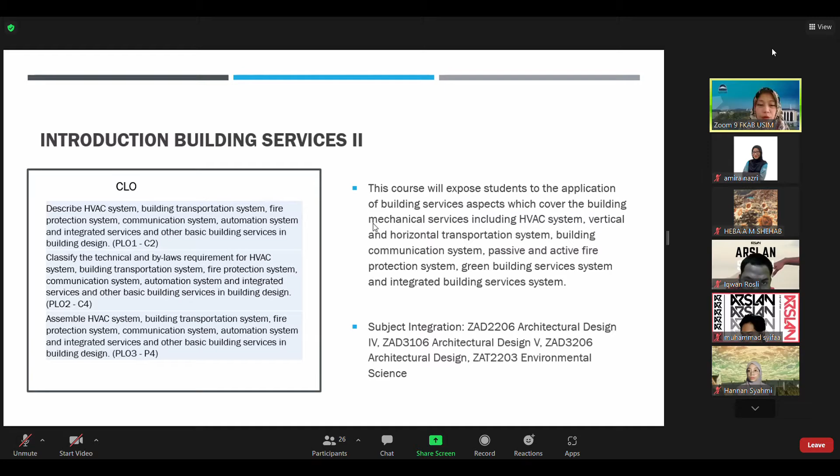Structurally build the buildings without a system. So this is the final, the complete buildings. So we need to understand all those services here, to embed together with the aesthetic, with all those colors, and how the vegetation is surrounding.

What is building services? This includes lighting, electrical, water supply, waste management system, aircon system, security, fire prevention, control and safety, mechanical transport, and also communication. So you may find that these are the main concerns as the architect, not only to draw, but you need to understand how it works in our buildings.

That is why management is not only for teamwork, but we are also in the technical, like building management system, to comprehend what is actually to embed in a building, to provide a responsive building that has communication, that can communicate with people effectively and support the environment.

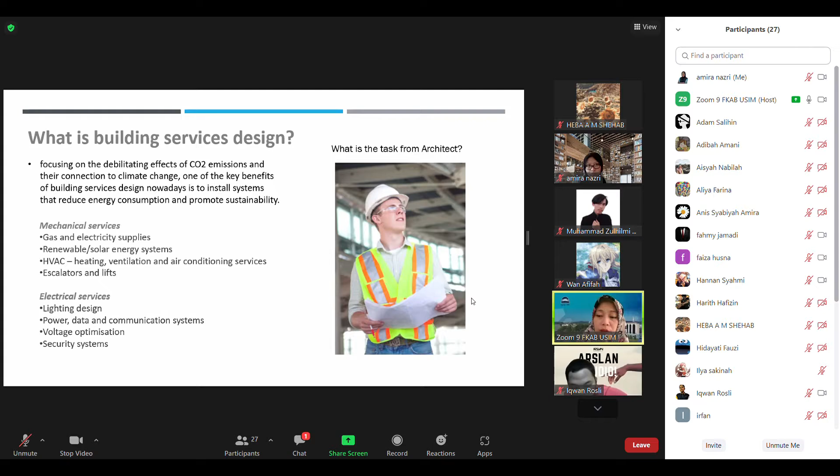So we come into a very serious part, a very serious stage. When you become an architect, you need to understand those stages - where to come, how to come, when the architects contribute to the building.

This is a person - if the architect has no knowledge at all. That's why this class is very important, tau, because in third year they don't have services anymore. So you have to master this class. So let's say I'm giving the task to Ilya.

Kita pergi tempat sekarang, you go to site, see what you can do. So you do not know if you don't have any knowledge, okay? What you're supposed to supervise at the site. You read the plan - yes, you can read the plan now.

You design - yes, you can design now. But how does this thing function, and have teamwork between mechanical - the interrelationship between mechanical, electrical engineer and architect. Apa task architect sebenarnya?

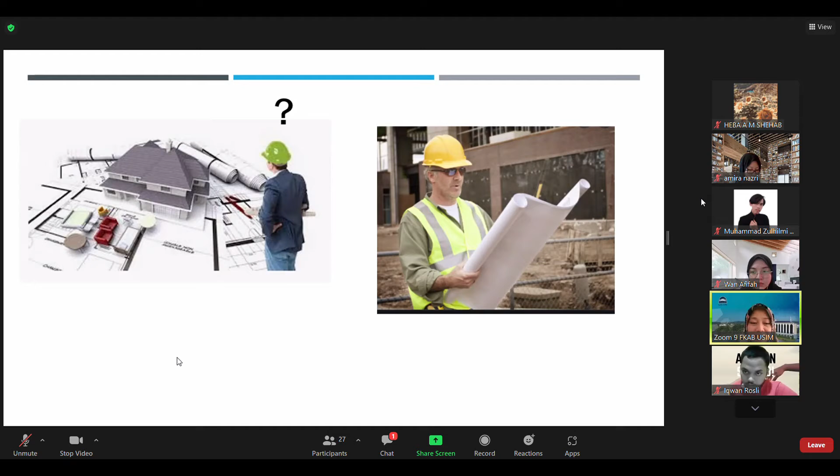Okay, you may read this one.

Building services design and energy efficiency, lots of ways, and also it's because architects have the decision where to allocate all those things. Lift, how does it look like? Bubble lift with glass screen. This will affect the cost.

Okay, escalator. Now what? Escalator is very costly. How much?

Okay, there are also the systems, lighting system. Nowadays we also use LED. Coming in PV solution, nowadays you beware with the PV.

What is PV? Photovoltaic. Everybody talks about PV, everybody can say, oh, I can draw PV, I propose PV. But what is PV all about? And how can PV generate electricity?

You need to understand. So in this class, we will have the green technology later on, around week 10 to week 14, because this kind of knowledge will be embedded in your design.

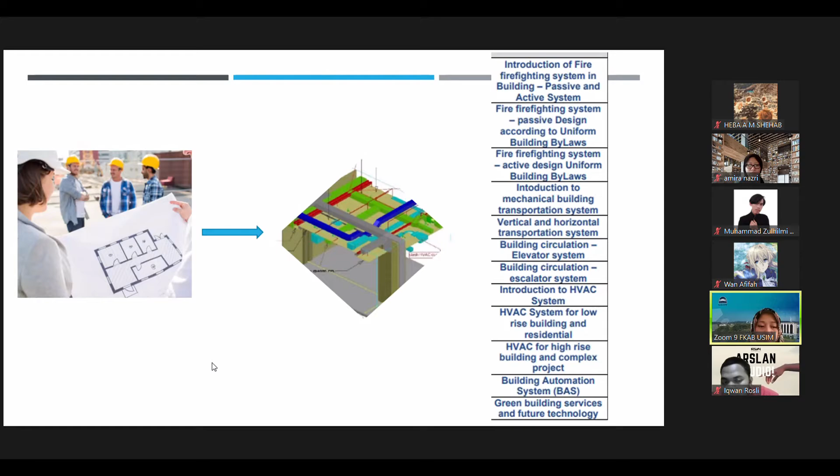Okay, for this class, I just give you the overview, the introduction for today, so that you will appreciate studying services. You will appreciate this class, you will appreciate this course.

Okay, so this is partly your seniors' work. Look at this one, it's very associated with your task. Okay, your left side is actually your site plan. Like the first day, you are going to have a site analysis. So what you should do? You need to analyze the surroundings.

You need to analyze here. What is surrounding here? Let's say this is your building. So radius for 2 kilometers.

Services, site analysis, watch out. Please take a look at your connection. What is it? Water connection, electrical connection.

If water connection, you must have in your mind, what is it? Inlet and outlet. What is inlet outlet? Coming water and distribute. When distribute water, that means it's sewerage, pembuangan sewerage. You have to understand. If not, how do you want to keep your sewerage? So you must bring all those sewerage to distribute to other parts, to the collection main.

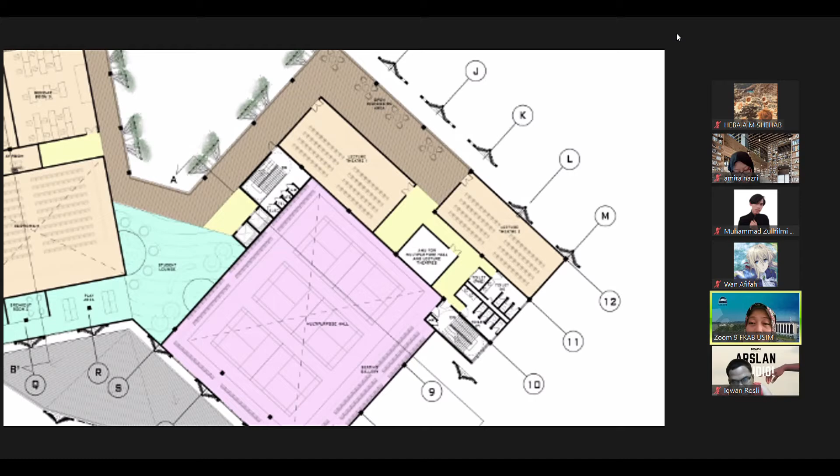Cannot, because the wiring has to be vertically connected from one floor to another floor. Okay, this part you can understand a little bit, and also how to check this is going to be parallel. So when you are designing a section, see, it has to be vertical. Lift, you cannot have the lift here and the second floor on your right side, your floor on your left side. It has to be vertical. How can this lift turn left and right?

And at the same time, you have to understand how the system for wiring above your ceiling area is. That is why in bylaws, you need to understand what is the viable height, the height needed for, let's say, public gallery. Gallery to public area, so you cannot design for 2 meters. In the bylaw, this is the minimum. The minimum would be 2.4, 2.7 meters.

Because 2.7 is clear, clear means not floor to floor. It's from the ceiling to your floor finish level. Floor finish level is above the tile. Okay, that's clear.

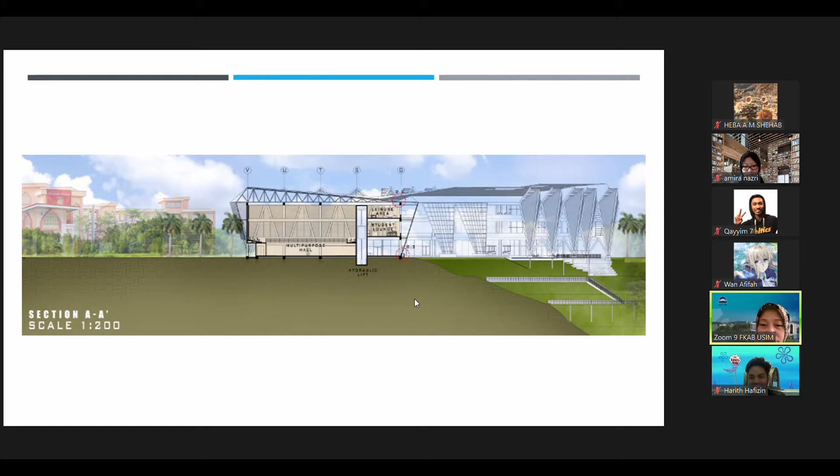Haris, don't sleep. Zul, ada Zul? Ada, madam. Alright, dengar suara. Semangat, insyaAllah. Okay, tak apa. This semester kena semangat lebih because this is quite tough.

But we try to help you all. Okay, that is why when you do the section, it's not on the structure side. See at this area, this is your senior's work. You have to think about the ceiling because all those piping, all those lines will be between. This is your concrete, this is your beam, and this is your ceiling.

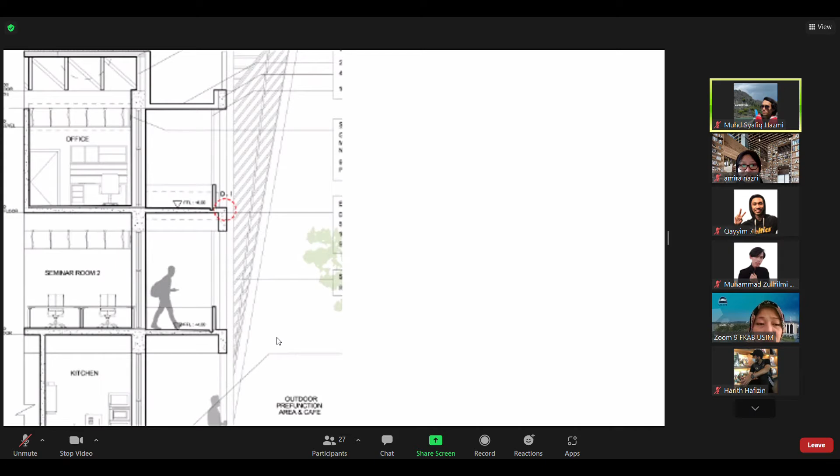So wiring, where you want to punch in? Dekat kawasan sini ni, you see my scroll? Nampak kan? Girls, bukan buat kek je girls, bangunan pun kena faham ni, mana wire nak punch in, right.

So this is architect's creativity. Sometimes when you ask other people that are not fond of design, they just say you can fix it out of the wall. But as an architect, we have to make the aesthetic value of the building somehow, or rather we cover it.

Sometimes we propose, okay let's say there is a rainwater downpipe coming in. Nampak tak cantik kan, rainwater downpipe, sometimes people propose the contractor just install it somewhere here. But the architect has the option to cover it, maybe with mineral fiber board to cover the rainwater downpipe. Nampaklah cantik and they colour bersama.

Okay, tak apa, I will show you the images. If it is not being supervised well by the architect, what happened to the building?

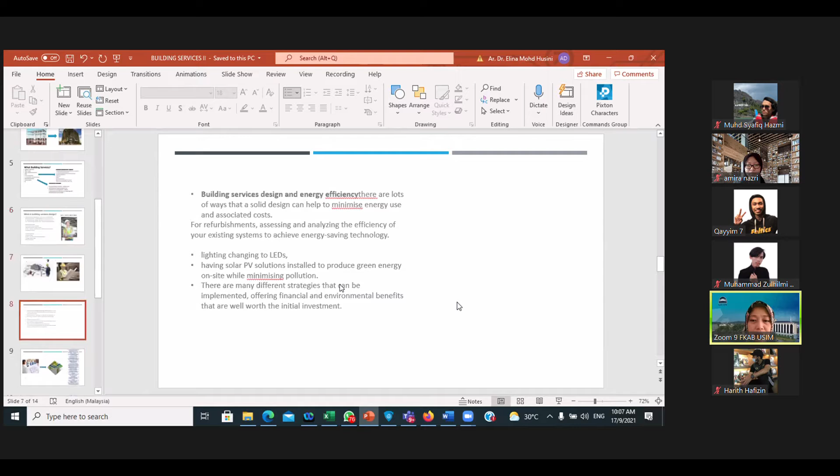You still can see this one? You still can see tak? Building automation system, building automation system. Oh itu sound system lah tu. Kat situ include all, sebab tu kalau misalnya you are designing a performance area, ataupun you may have the gallery, it's a hall.

So you need to design a space where people can control kat situ the sound system. Nampak tak, biasa dekat cinema, panggung wayang. Satu lagi, you can see those control room at a multi-purpose hall at the upper level, upper floor. Betul tak? Dan ini, pergi panggung wayang tak? You go to cinema? So you may explore where those people sit in this area.

So architect need to design tau, architect need to allocate where is the space for them. Nampak tak kerja architect susah tau. Tapi with this knowledge, insyaAllah, this is our responsibility. Okay, any other question? I open to question.

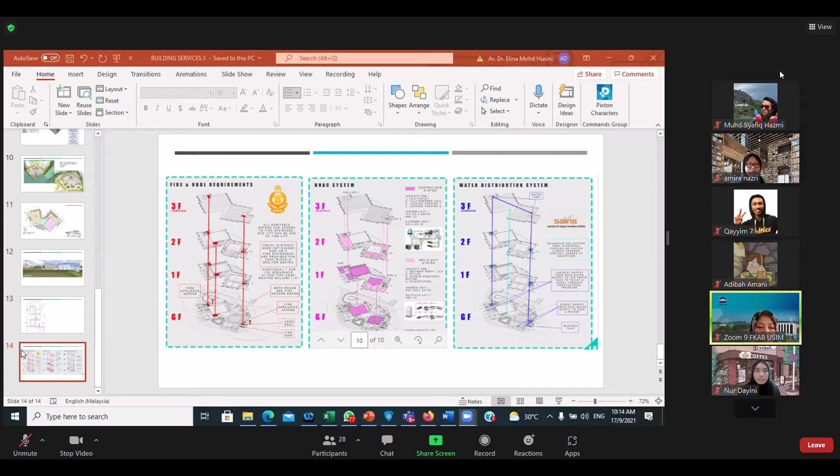Design - how to connect our thinking process to application, because you may think it's very difficult to adapt everything. No, it's very simple. That's why the second topic is the regulation part, so everybody knows the limitations. To design a lift, you want to get the knowledge of what is the exact size. When you are doing site analysis, those groups who did your site analysis must have the right size.

Okay, can everybody try to download the building bylaw, the latest building bylaw, 2010 building bylaw. Does anyone have it? Wait a moment. Okay.

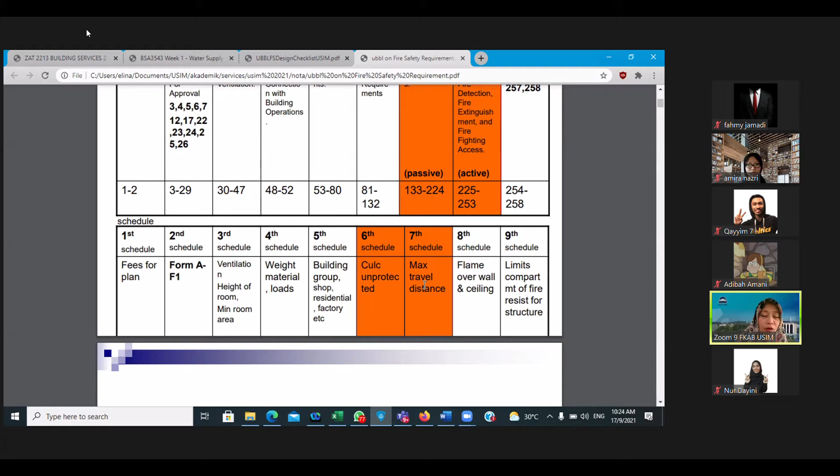This is where you need to design the distance from one point to another, your fire staircase. Of course your gallery will have a few fire staircases, not just one set of fire staircase, okay, a lot. This is based on your maximum travel distance.

And also you need to know passive and active fire protection. What is passive and active? Here, they call it 'kehendak menentang kebakaran' (fire resistance requirements). I will find you the English part. Some of the bylaws are written in English and also in Bahasa, so you may find the English part. You need to understand what is the purpose group.

It means, is your building for public use? Is your building for student, school category, or housing category? So the gallery is in the public category, commercial.

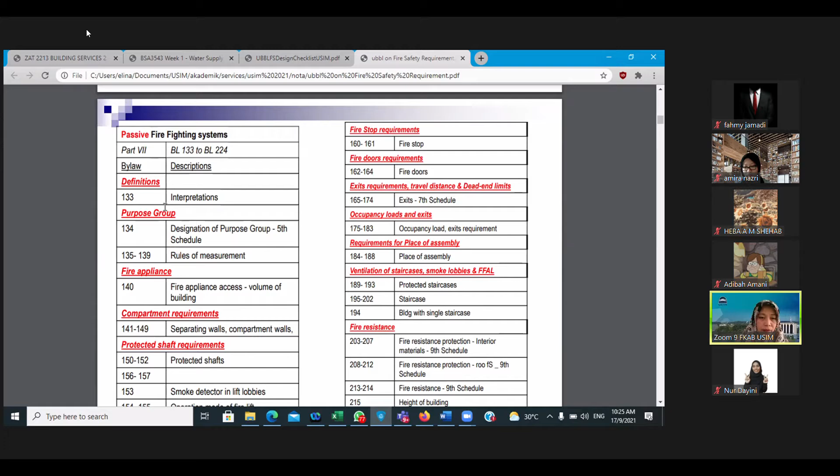And these are all the sections. When you talk to people, when you talk to Abang Bomba, you say my staircase is according to bylaw, according to section 140. You kena faham, you kena understand this one. You cannot just simply say according to fire regulation in bylaw, this is just general - you have to go in-depth on which section the bylaw says about fire appliances.

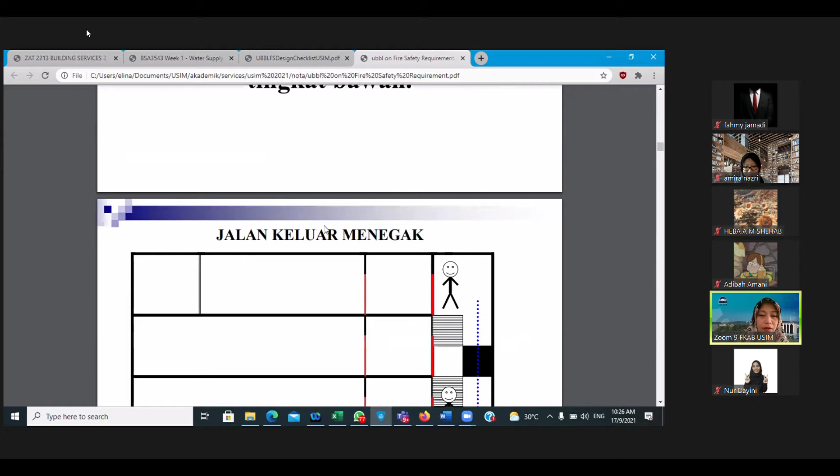Okay, alright. Because bylaws is a lot of bylaws, we just attach to what is needed.

Okay, so let's say that this is actually the route, the escape route. So this is just a very basic thing, meaning that this is all those offices, this is a fire staircase, and this is a lift. So where is actually you need to design a lift, and where is the best place, the best area to design and locate the lift area.

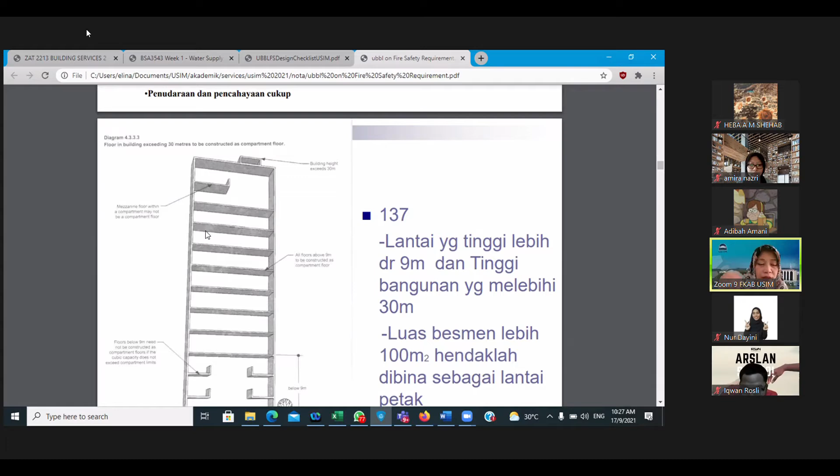This is also need to understand what is the height of the building. That is why when you try to design, when it comes to week 4 or week 5, to your individual stage, you need to understand, you need to identify what is the height of your building based on your sketch. That is why you need to sketch from the earlier stage. Cannot simply use computer straightly, move your cursor and do the floor. You have to sketch first to identify where is the exact level.

And see whether your accessibility is actually about a quarter of the land side. It's okay, today is just introduction. I am doing the calculation based on your drawing on week 4 later on. Okay, this is just introduction - what is inside your building bylaw?

So it's also related to mathematics a bit. The calculation, how you want to find the volume. The volume, how do you calculate the volume? How do you calculate the volume of the space? Panjang kali lebar kali tinggi - width times... the height times width, times... yeah, so you get your measurement on your volume.

So based on the volume, let's say this is the building, so you have to refer to the schedule. This schedule you can't calculate, it's already there in the bylaw. Minimum perimeter, meaning that 3/4 of the site here to allocate your accessibility for bomba, for fire engine to move around within your building. Okay, this is the schedule.

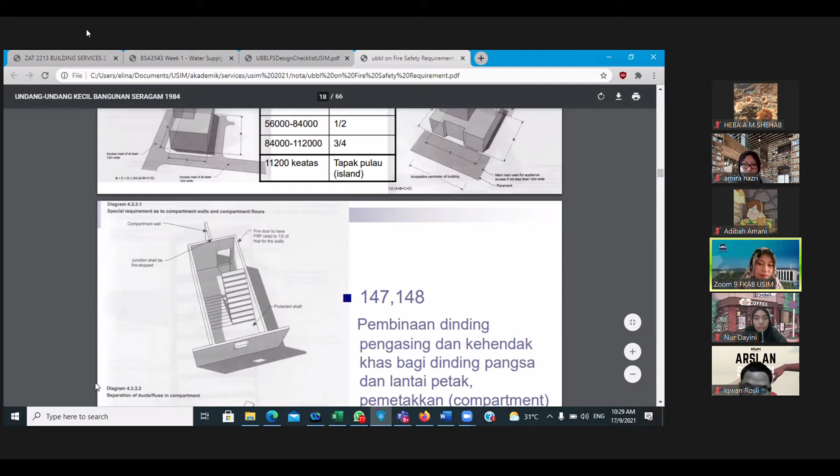So same goes to this one - this is a fire staircase. Where you want to allocate the fire staircase? What is the size actually for public? And you do have the opening at your fire staircase, the material, the size, the thickness of the wall - these are all stipulated in your building bylaw.

And of course here, is there any place to put your ducting pipes? Alright.

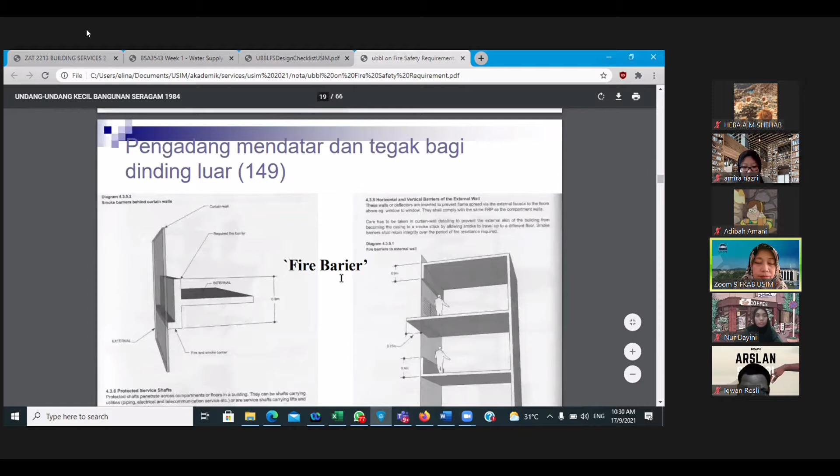Okay, why do you have to know this one? Because when you are designing the partition or the wall, you have to think along with the piping that will go from down here up vertically to your upmost story. Let's say you are having a riser - what is inside the riser? Telecom wiring. Okay, what else? The electrical, the piping for cold water, hot water if necessary. Okay, that is why you need to locate where exactly.

So somehow or other, we can refer back to the drawing I was showing you just now. Okay, where was it earlier?

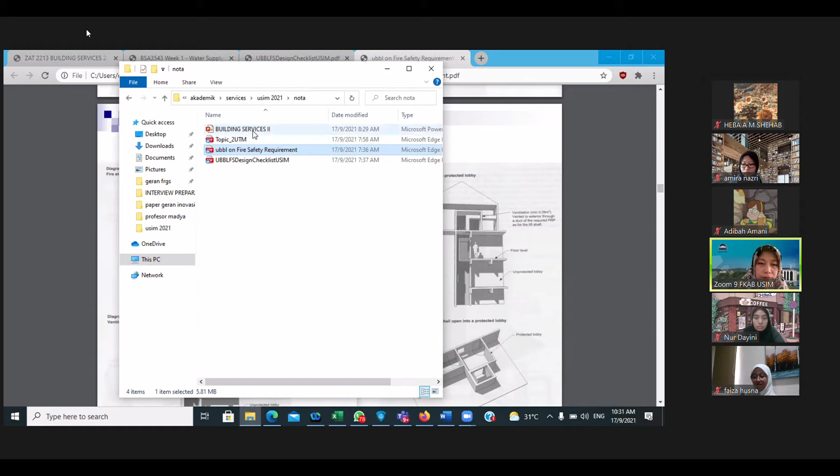Okay, see this - the area you design, we call it partly a services area that will allocate all those piping and wiring vertically. This is in the drawing, you may try to design as it is, but with reference to how much the height, the size of the area. That is why you need this to refer to how much space is actually required.

Okay, just now I mentioned only lift, only escalator. But that one, they can move, they can't function without the wiring part, and also the automatic part, meaning the automation part. In the bylaw, you may see that there is a passive and active design. Passive is without automation. What is the area that is without automation? It's the staircase. So you need to understand where the staircase is to be located in your drawings, in your design.

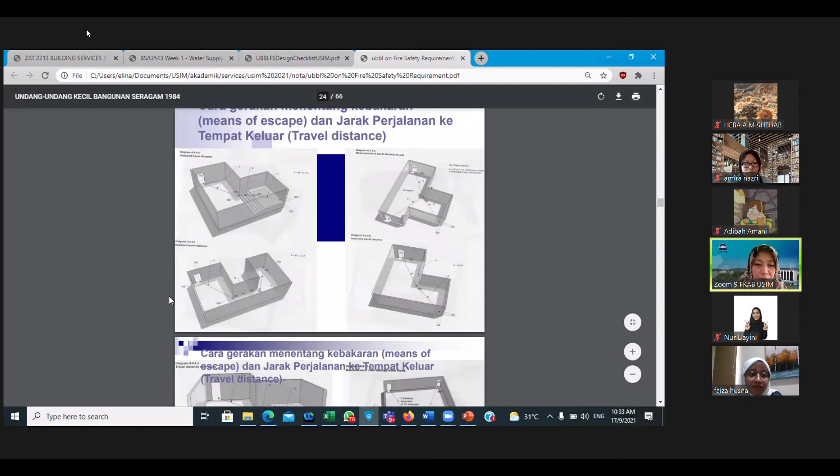Okay, faham? Faiza, ada soalan tak? Up to here, I think takut you all dah jumble with those things. Any question? Faiza, any question tak? No, madam. Okay so far boleh, madam. Yeah.

Madam, I want to ask, for the space for the fire resistant, do we need to divide the space, or can we combine the space with other space? For example, we put the fire resistant space together with maybe the lobby space. Can we combine it together or not?

Okay, that's why when we are designing a space, there's an area we call nettable area, and gross floor area. Gross floor area means all of this, look at this drawing - these are all gross floor area, the total floor area.

When we call it services area, it only consists of toilet - there's a connection with the water supply, the toilet area, control system room. This is also the passive fire staircase area, categorized under services. There is also electrical area here - wiring, the board, switchboard, everything.

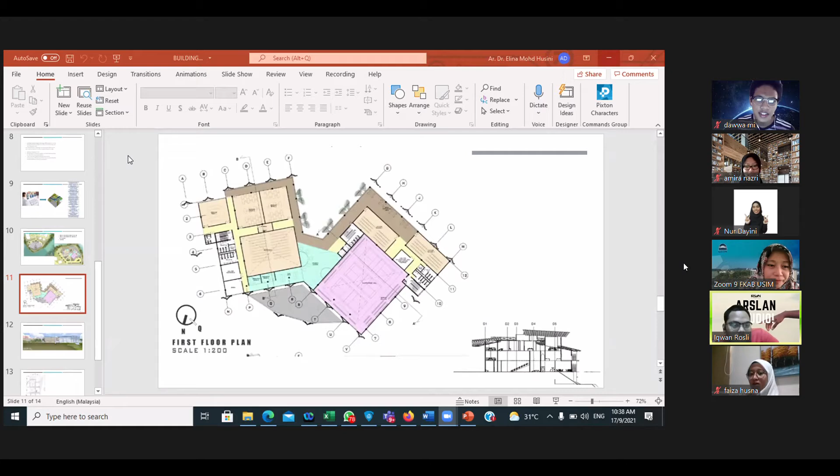So basically, madam, for the services space, we need to divide it lah kan? They have a special - it's not divide. You need to design. We can't say divide, because if you divide, how you want to divide? This is not mathematics, this is design.

Design means that, okay, look at this. It's not so well an image. Okay see how this one - this ties back to your design. I can foresee that this area is a lobby.

Lobby needs to provide a very huge, wide, welcoming area. That's the sitting area. You have to think about where the receptionist, the display area, to show pusat apa, gallery, rumah panjang. Where you want to allocate all those name of the building, so the display area - where? At the lobby area - where? So you have to design.

Okay, ni baru gallery. So what are the requirements needed in the gallery? Can somebody see back what is embedded in your design? Dah buka design class - that always, they already have design class kan?

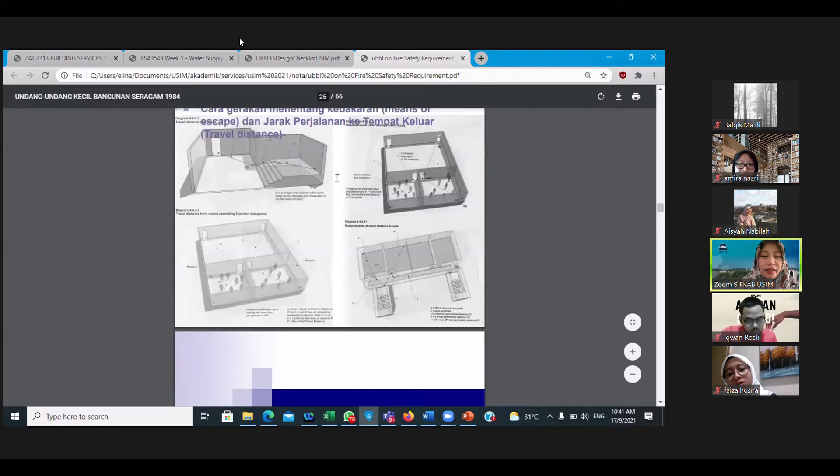Why is this very important when we talk about travel distance? Let's say you're building your area and you have to provide another partition or wall. There is a regulation, and you have to find where the main door to escape is. So if you are proposing another wall somewhere here, from this door to the end of the area, it needs to be only 6 meters.

What happens if it's more than 6 meters? Why? Because people cannot escape within 1 or 2 hours according to your specification. This is actually the fire door. It has to be a fire door because it will detect if there is a fire. The door is about 1 or 2 hours fire resistant, that's why we call it a fire door.

Okay, so normally for a building less than 12 meters, you can provide only 1 door, with the reason that your building is only for residential, not for public. But your gallery now is meant for public. Even though your building is less than 12 meters, you need to provide another secondary access. That's why you need 2 staircases.

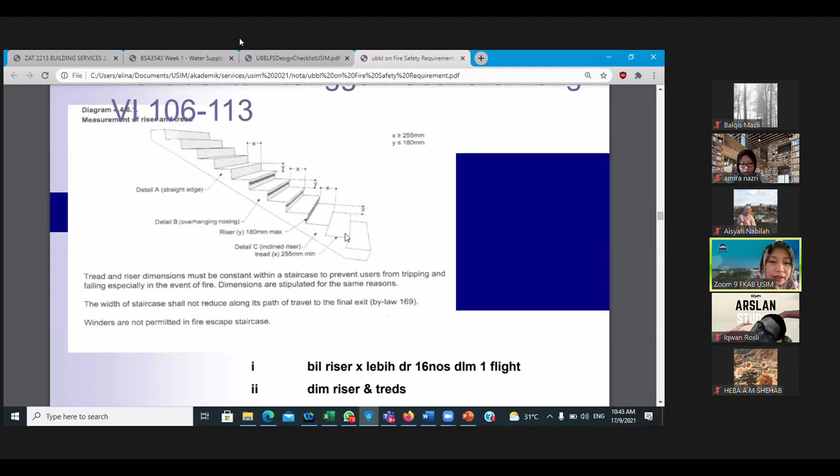This is a very fundamental design. You need to know what is the maximum for the tread and riser of the staircase. This is very much related to your design. Later on, you will design how many steps are needed. So based on the bylaws, this is your tread, the horizontal part, and vertical here we call it the riser. So take this one, okay.

Minimum is 255 mm, minimum. What happens if minimum - you can provide 270 here, but you cannot provide 250 or 245. Why? Iqwan, do you have a reason? Can you share? Is there any reason? Why can't you design less than 255? She says this is minimum, meaning only 255 and above. You cannot go lower than this number.

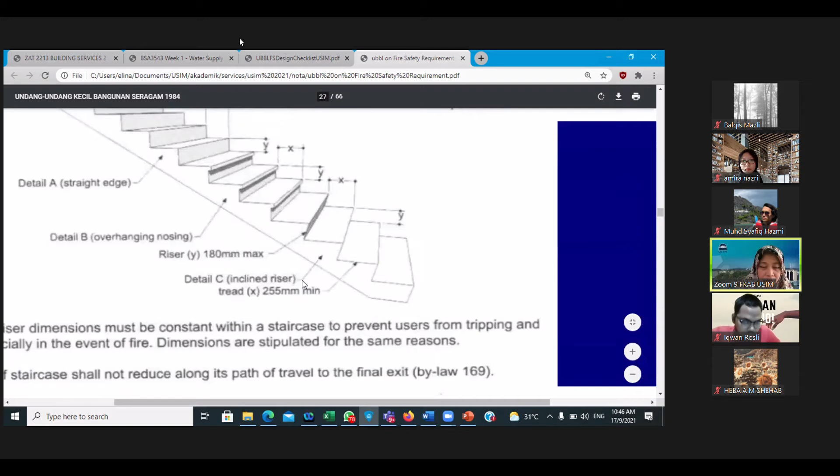Okay, all right. So remember, this is what you want to refer to: the width of the step, the riser. Okay, see the riser. The riser here, why?

180 mm maximum, you cannot go higher. 185, can or not? Who's this? I want to ask. Dawwa, you're silent, Dawwa. Yes madam, can I say that you need to design 185 here? Cannot, because the maximum required is only 180. Yes, so normally people can go for 150.

150 is general, a very normal measurement. And this one, the tread is 275 or 300 - see what is the function. If this is a fire escape, you can use this measurement. If for public needs, with lots of people arriving at the area, you can have a larger tread, meaning it can be up to 300 mm here.

The tread, okay, alright. Understand this, Dawwa? Understand, madam.

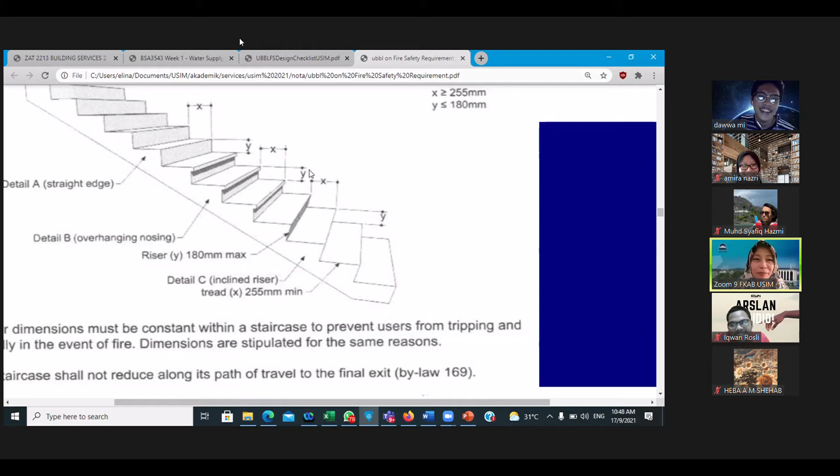Okay, so far that's it. We talked about bylaws. This one you have to read, you have to analyze. Okay, this is not your level yet. A protected lobby is needed, because a protected lobby has to be protected - you have to provide a fire door, and the wall thickness should be 230 mm. When to apply this? It's based on the height of the building. So how many stories should you provide for your gallery? Is there - bro already said.

More or less 2 stories, about 12 to 13 meters height. So you don't need a protected lobby. Third year second semester you need it, because the building is up to 8 stories. Somehow you may or may not need the protected lobby.

I'm just giving you the fundamentals. This is also something you have read.

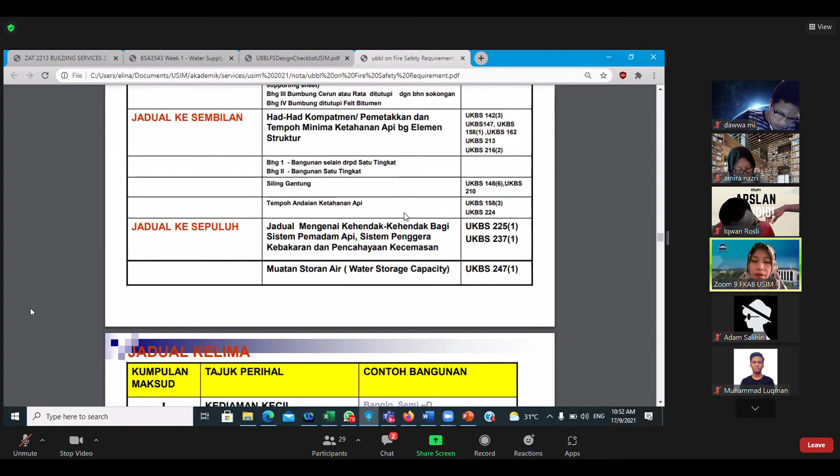So my task today for you is to download the PDF, the latest bylaws regulation, and distribute it to your friends. You have to find it. This slide is already summarized, because in the bylaws there are a lot of pages and you do not know where to read first or where to allocate your understanding. So this is already summarized, but you need to know the overview of this regulation.

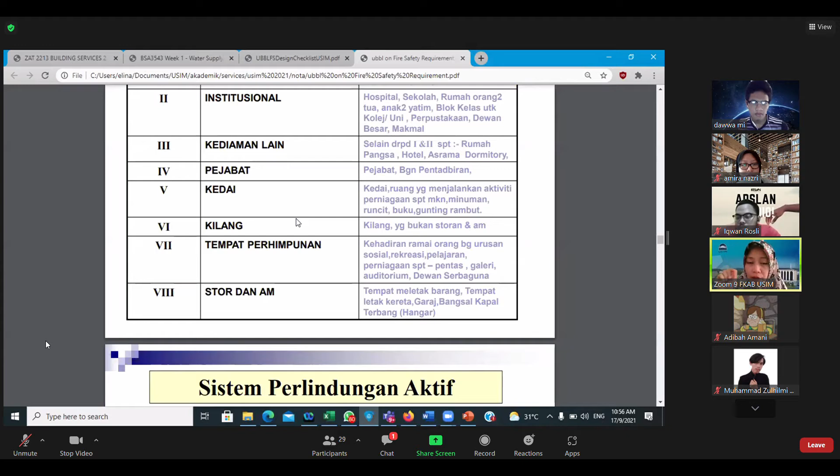You have to jot this down. You have to open Schedule 5, find Schedule 5 in your PDF bylaw. Inside your PDF you can find this, Category 7, Group 7, 1, 2, 3, 4, 5, 6, 7. Find it first, okay.

So inside there you may read the description. After you read this description, that gallery is under this category, you have to find Schedule 7 inside your bylaw. Find that first, later I will discuss it, but you have to find it first. If not, you cannot imagine it.

Download first, find Schedule 5, see Category 7, perhimpunan orang awam, for public. And find Schedule 7, find what page Schedule 7 is on, see Category 7. That's your homework first.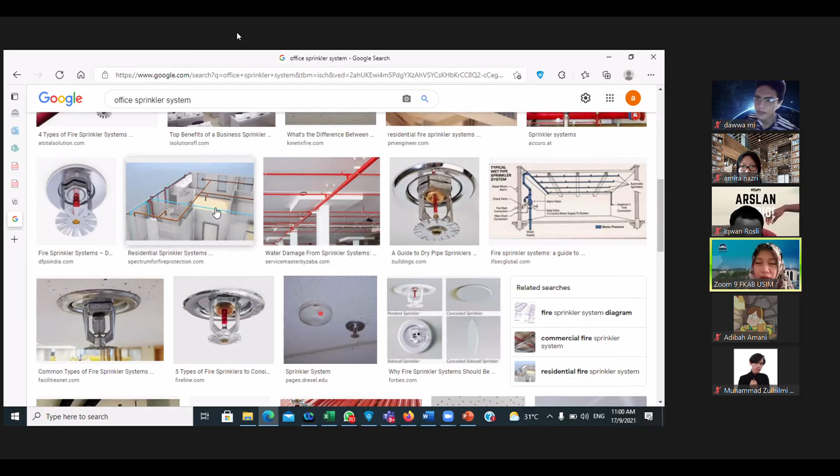would be water piping, cool water or hot water, running above the ceiling area. If you take out the ceiling, you may see that these pipes run above your head, above your ceiling area. This happens.

And also they have a fire sprinkler. Fire sprinkler is for high-rise buildings. I'm not so sure, but if you are only designed for 2 stories, there's no need for fire sprinkler. But if you are designing more than 8 stories, you need fire sprinkler because your building exceeds 18.3 meters height.

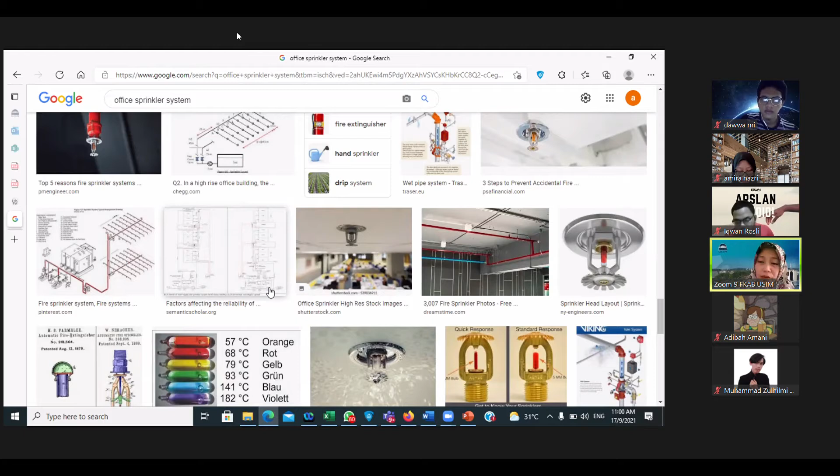Okay, now you are adapting. In your Services 1, did you also learn about this fire protection? Your Services 1... You're muted. What did you learn in your Services 1?

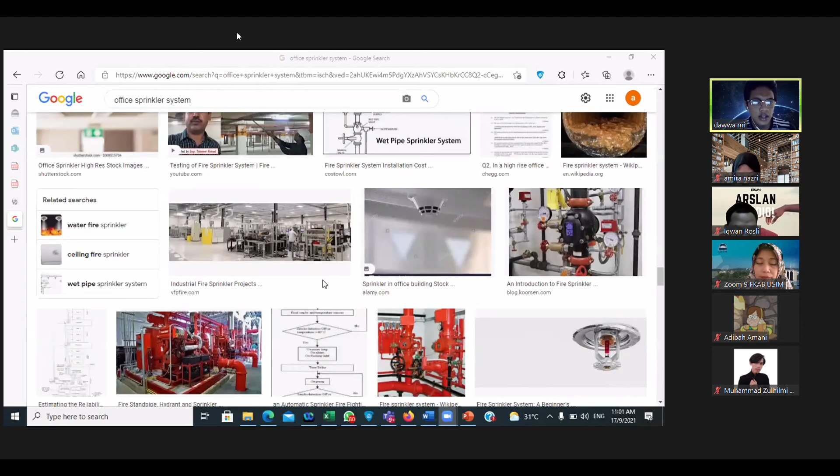In Services 1, I think we did not learn about fire sprinkler or fire safety, but we generally learned about the water system, plumbing system, electrical system, for housing. For housing, okay, it's more or less the same.

But now the gallery is larger, right? More complex. Previously your housing was only one story, about 6 meters from the top rooftop, but the ceiling height to finished floor level is only 3 meters. Now 2 stories means another story on top, so your building may be 8 meters, based on your design. That is why more systems need to be included in the building.

See? The higher the building, the more systems you need to include to make it function. So it's very complex, but it's satisfying if you know this kind of information—you can design whatever story.

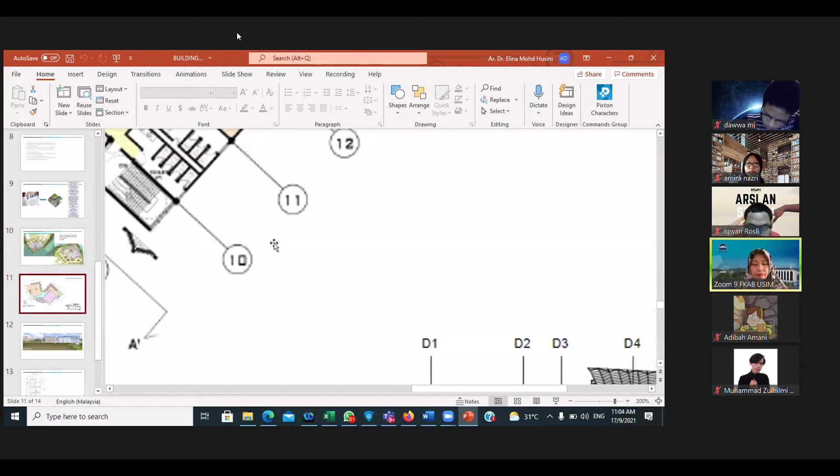Where do you want to design to put all these things? At the services area. I already told you, where is the services area? Okay wait, let me break it down. Services area meaning somewhere here at grid 10 to 11.

So you have to design all this piping to come in vertically at this area. It cannot be at the middle, cannot be at the lobby, cannot be sometimes at the learning area or the office in the middle. No, you specify them—it has to be at the zone area of the services.

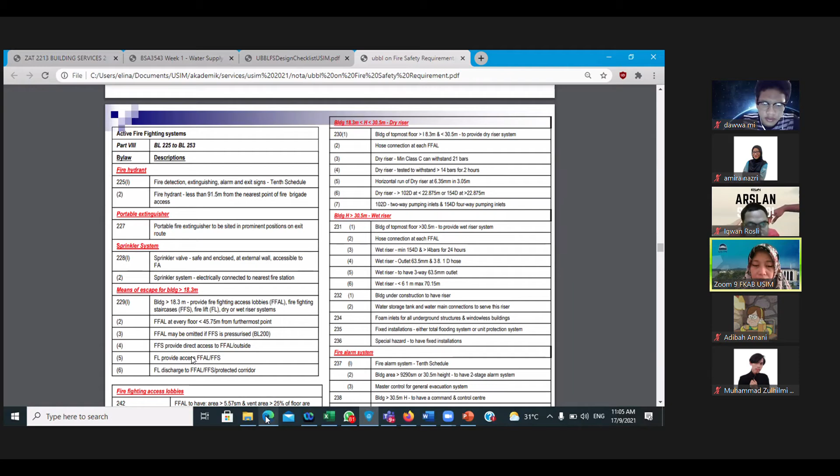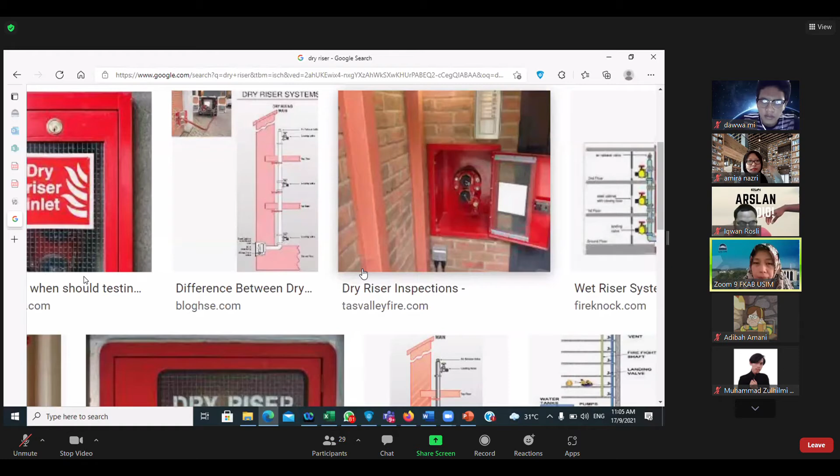Come back. Dry riser. Okay, this is when the fire engine comes, they just take the water through the piping from the dry riser inlet, that's its name. So they just provide a place for the pipe somewhere here. See, this image just has a pipe, there's a place to fix it—water from the fire engine disperses to other floors. That is what dry riser is. This is the dry riser outlet. So they need a pump—if there's a dry riser, they must have a pump.

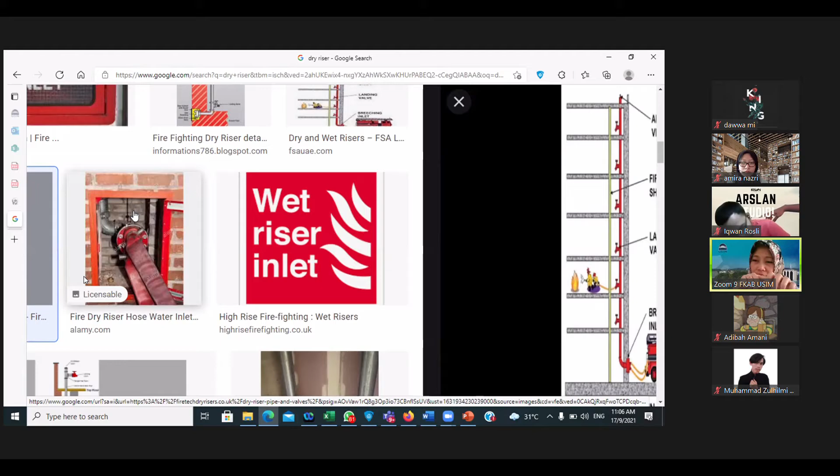Okay, what is wet riser? This question always comes up in exams. Wet riser—what is the difference between wet riser and dry riser? I repeat, look at this image. Dry riser: when the fire engine comes, they just tap the hose into the water inlet, so the area of the fire dry riser—they just tap it and the water comes out directly.

Normally for high-rise building, we need dry riser. Why? It's because water pressure won't be adequate. Tak cukup water pressure, so there must have a dry riser there.

To allow the valve access, itu adalah one of the reason. Okay, tengok sini apa dia. Wet riser pula, wet riser.

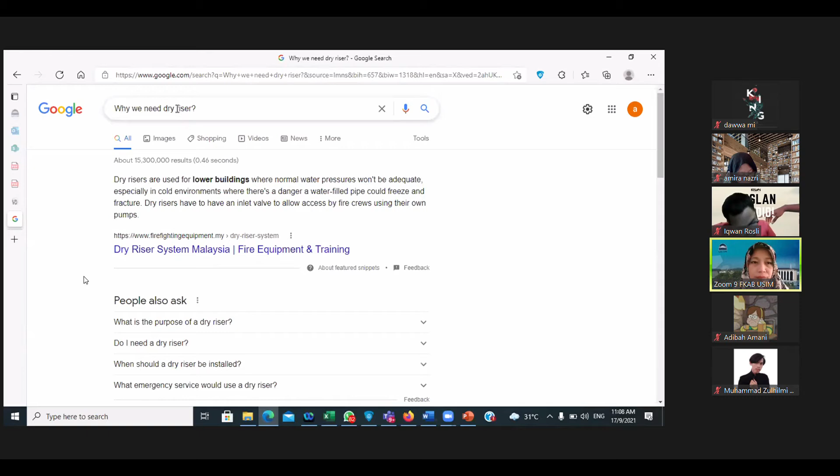Okay, ini sebenarnya nanti the next, tetapi kita today just to know the exact vocab in services, so that you familiarize.

Wet riser, so wet riser are permanently charged with water. And dry riser do not contain water inside. They need the fire engine with the hose, fix, connect, barulah keluar air. There's a water from the fire engine. The dry riser is only a place, the hole, the pipe there without water. But wet riser, they are permanently charged with water. They have to supply water. Inside wet riser has water.

Okay, we see the image here. Ni dalam. If you cut this pipe, there is water inside. But for dry riser, no, there's no water unless you connect the hose from the fire engine. There would be water running through the pipe. Wet riser is always charged with water. Whatever time you cut here, there will be water here.

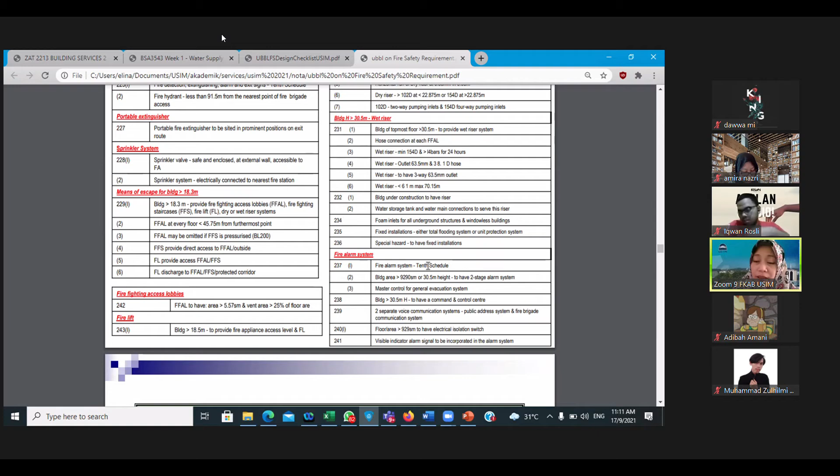I'm showing to you, if you're gonna do the submission to Bomba, when you work with industry, you are preparing Bomba submission for approval. So you need to identify the location, proposed location for fire alarm.

Okay, I stop dulu sementara. Any question? So today just to understand the vocab, the words, the wording. These wordings, the image would be like this.

Any question? Boleh, madam. Siapa for tu? Ilya, Ilya. Oh Ilya, for the wet riser, does it mean that if it's leak, the water will running endlessly? Okay, that's the question. What's for the wet riser?

Okay, wet riser. Kalau bocor, water tu will still running? Yes. Tetapi dia ada tempat untuk control dia punya. Okay, see back this images, mana images wet riser. Sebab tu dia tak boleh bocor. No.

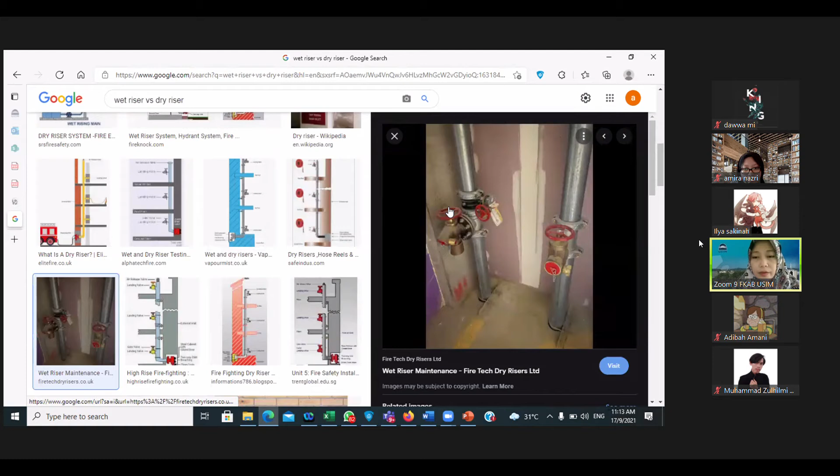Okay, so dekat sini dia ada, you can open up here. So if let's say on the upper floor they want to have maintenance, they will close down the pipe by using this tap. They screw the tap, betul. So they need this thing to control. Boleh Ilya? If they open this one all the way up, there's water charge inside here. But let's say there's maintenance happen at upper floor, they have to close the pipe.

Okay, say madam. The announcement like it's just like our building Tamhidi. Our building Tamhidi, they want to clean up the tank at the rooftop area, they will close so that the water is not coming out. So they control from there.

Madam, for the wet riser, it get the water from fire engine? No, from the tank, kita ada tank. Right, I tunjuk gambar. Wet riser dia ada tank dia. For the dry riser, dry riser lain. Dry riser get the water directly daripada fire engine. Dia ada bawa air dia dalam fire engine dan dia tap melalui hose. Turunkan hose dia. You know what is hose? Yang macam fire apa tu, hose reel tu. So dia sambungkan, connect the water.

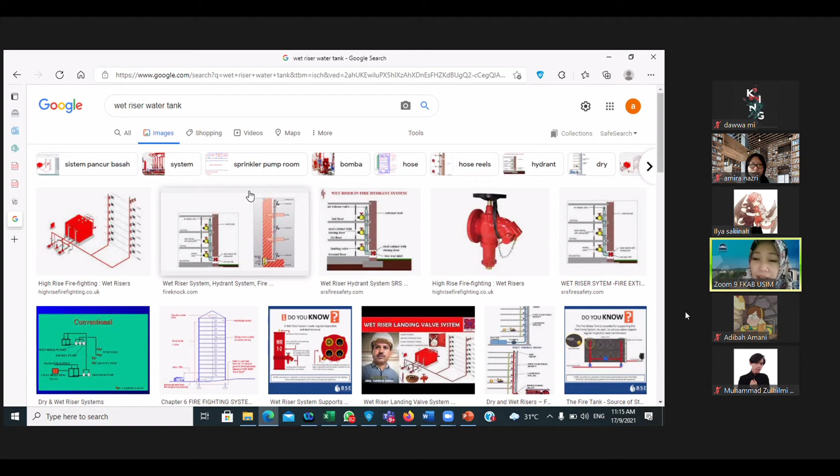Dalam fire engine tu dia ada water tank dia sendiri kat situ, to supply water dekat tempat yang tak ada pressure, menghadapi masalah pressure air. Tetapi kalau wet riser, dia ada tank dia. Okay, tengok dia punya ni, nampak ni, atas kat roof ni ada tank.

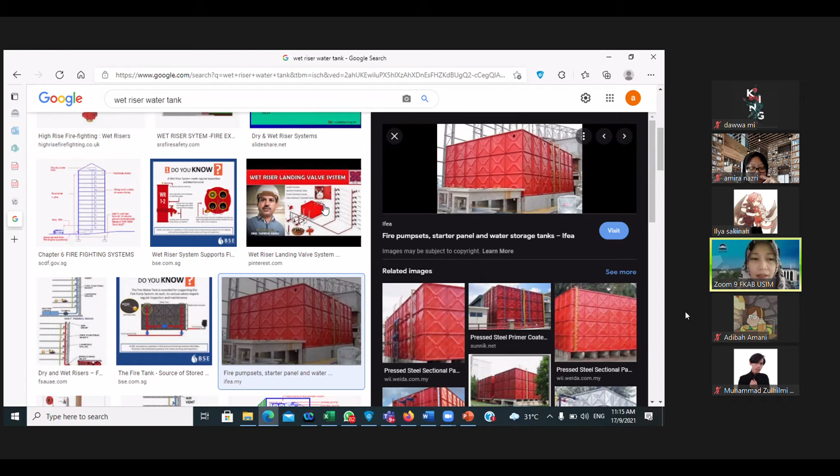This is for a big building. For you, it's only a quarter of it. This is the tank. It supplies your wet riser because there's always water inside the pipe. This is the diagrammatic view, with the storage tank here. Understand?

Okay, thank you. Anyway, you can also do your own research on this. Wait, where was the image? Because this is the first time you're vetting the bylaws, and at the same time you get familiar with the terms.

See, there's a tank. Where is the connection? That's why during site analysis you need to know where the main distribution pipe is from the land. Let's say the land is somewhere here, then underneath there's piping and there must be a pump. So the water gets pumped into the tank, goes up vertically, and is stored inside the storage tank.

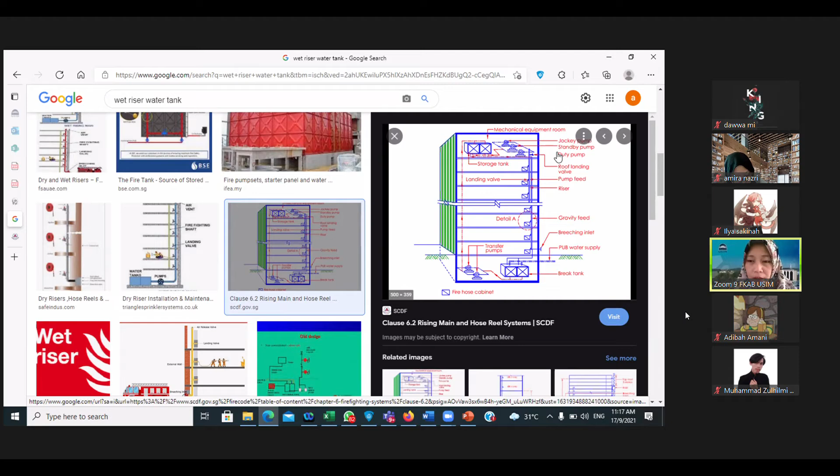Then they distribute it to where? To the toilets. There's also a fire tank for the wet riser, and a domestic tank. So on the roof area there would be more than one tank - a fire tank and a storage tank for domestic water. So they need a pump to pump the water and distribute it to each level.

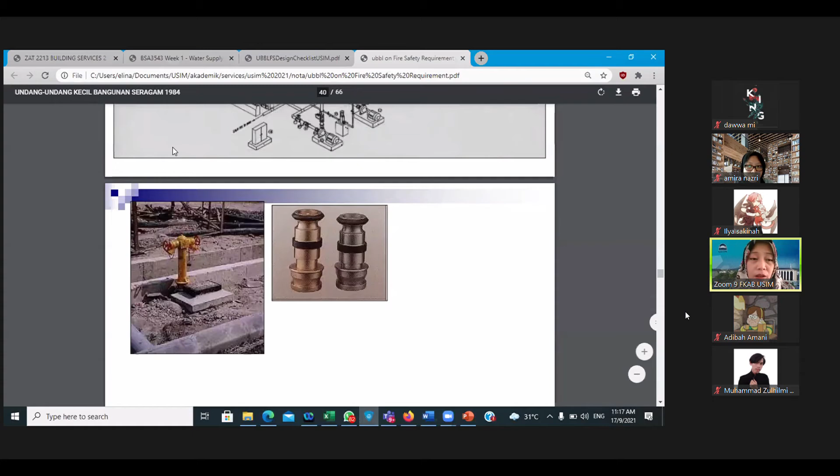Right. Okay, we will learn this in week 5, week 4 we'll learn about water distribution and water supply. Today I just want you to familiarize yourselves with all these words so that when you read, you know what it looks like.

You need to understand also the hose reel. What is a hose reel? Why do you need a hose reel? Hanan, why do you need a hose reel? To distribute the water from one place to another efficiently. It needs a reel that's specified for that purpose, during a building fire - when there's a fire, that's why it's for firefighting.

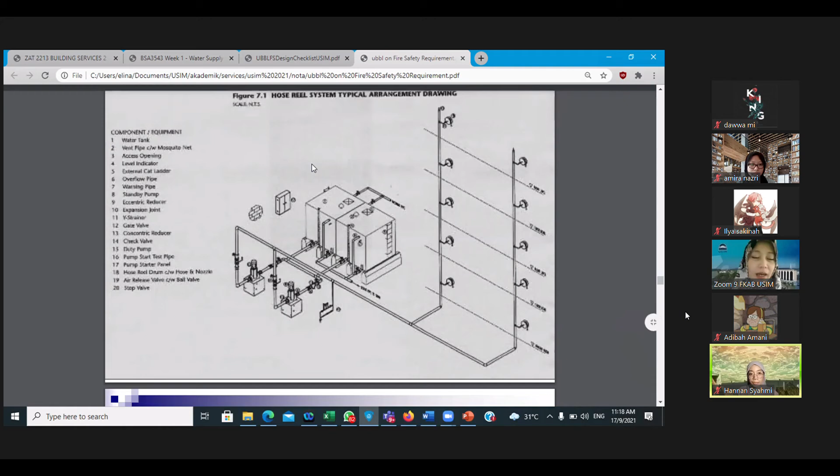Okay, hose reel system. So for the architect, we need to understand where we want to allocate those hose reels. We cannot simply design a place for a hose reel. Let's look at the image of what a hose reel looks like.

This is a hose reel. Does everyone know hose reel? She's never seen a hose reel before. At Tamhidi, at the back side of the studio, they have one closet - inside there, when you open it up, there would be one fire hose reel. So how does this work? This hose reel must have its own fire tank. There is a tank on top of the roof that distributes the water.

The tank has water. So when you press here - if you want to try it, it's dangerous at Tamhidi when you want to try it - you are using this hose reel to distribute water. But there is a regulation inside the building bylaw: you cannot simply place a hose reel. It must be 30 meters from the first exit of the entrance.

Okay, I will show you the plan. This is our plan. Wait. See, this is the plan, this is the frontage, the opening, the welcoming area, the front door. From the front door, you calculate 30 meters and you will allocate your first hose reel in a hose reel box. You cannot simply put it outside of the wall, but you have to provide the casing.

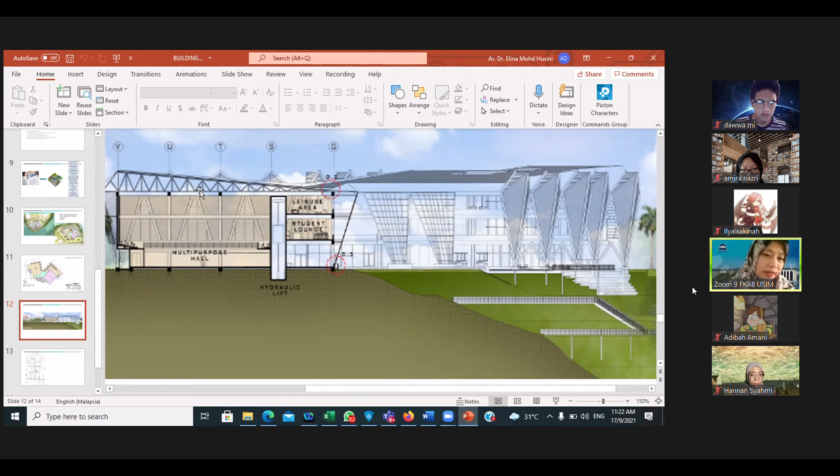Okay, once you have this, it means you need to provide on top, there would be a tank - it must have a tank somewhere here. You have to think about where you want to allocate the tank according to the height of the roof. So when you do your site analysis later, you already think about where to allocate things, what are the areas, what are the distances, what are the heights that should allocate your tank. Site analysis is not only about visuals and having fun - not just the height of the leveling, but you need to think about the height of the building, which is very important for you to allocate the sizing and the distance.

Put inside your head, manage your building - that is how this system will work. Like my first slide, building management is very, very important. Until this: according to your electricity management, your water management, everything is included in building management.

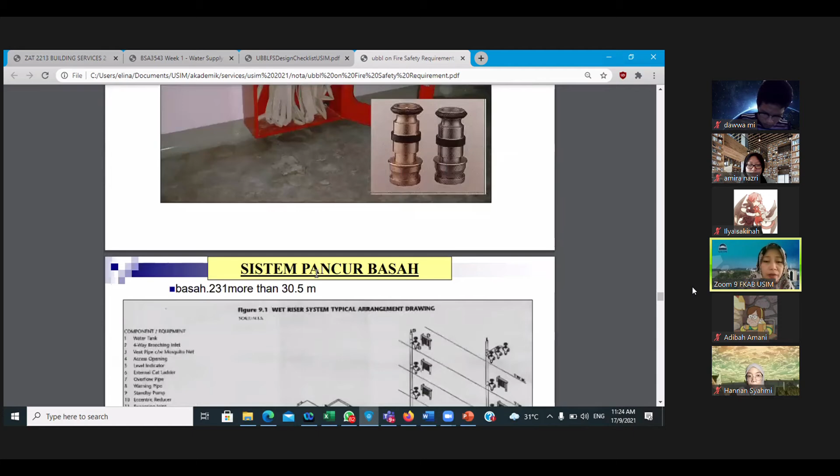A little more, I'm about to finish this so you may be familiar when you read back. In Bahasa the term is pancur basah, wet riser. This actually happens at your services area, at your tank, roof area, fire tank. So when you have the opportunity to visit a building, make sure you go up to the roof area - you may see how they allocate, how the piping works.

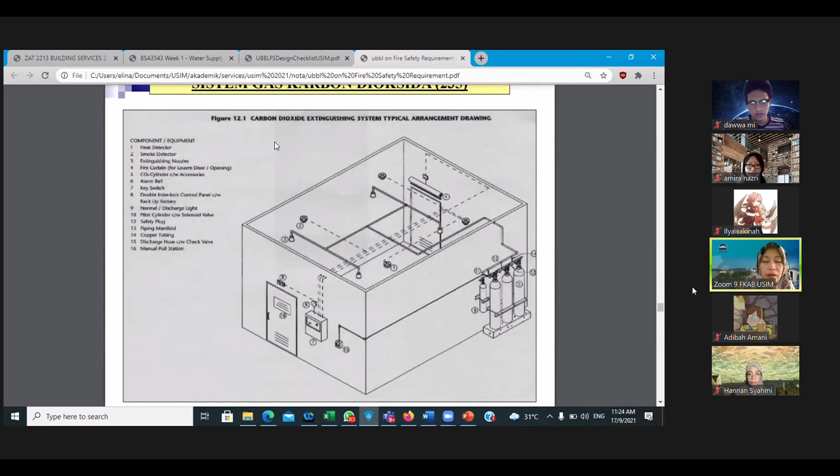And also there's a room here for carbon dioxide. This is very typical - if you come across visiting a building, you may find a room with a carbon dioxide extinguishing system. What's inside it? These are the images.

So this is an active system because it requires electricity to function. Penggera kebakaran - this is actually the fire alarm, kring kring kring here. And fire smoke detector - the smoke detector is actually at your ceiling area, to detect fire, to detect smoke. That's why we call it smoke detector. This is the image.

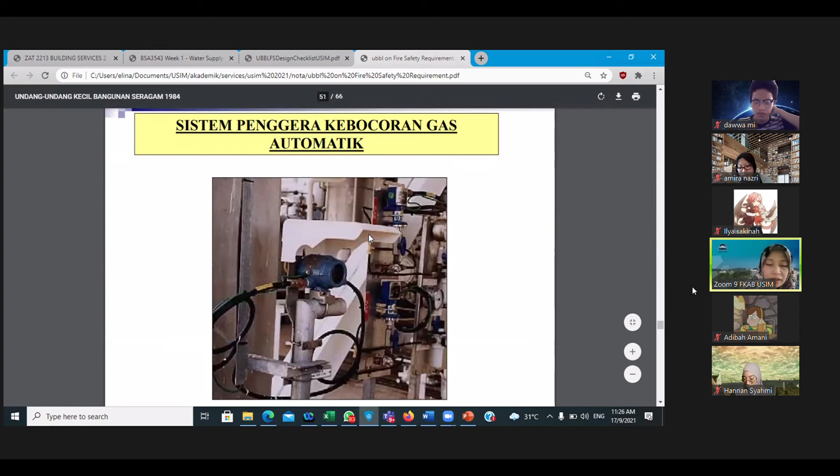When there is a leaking, let's say the function of the building may be an industrial area, so they may detect the leaking for gases. So if there's a leak somewhere here, the alarm will function.

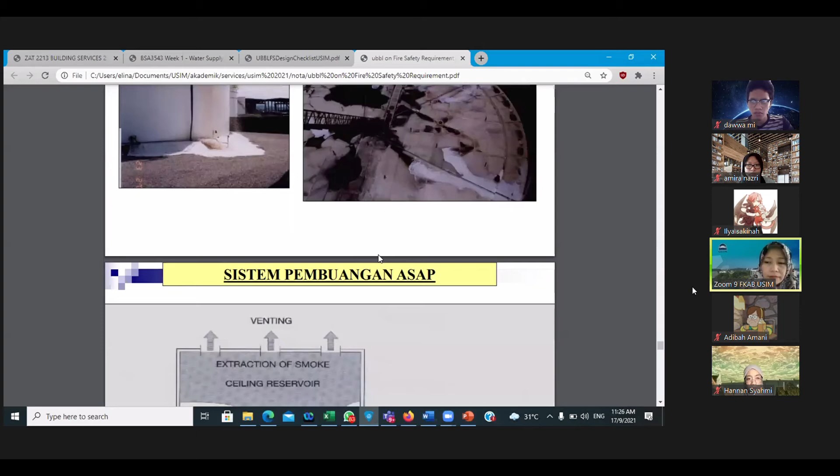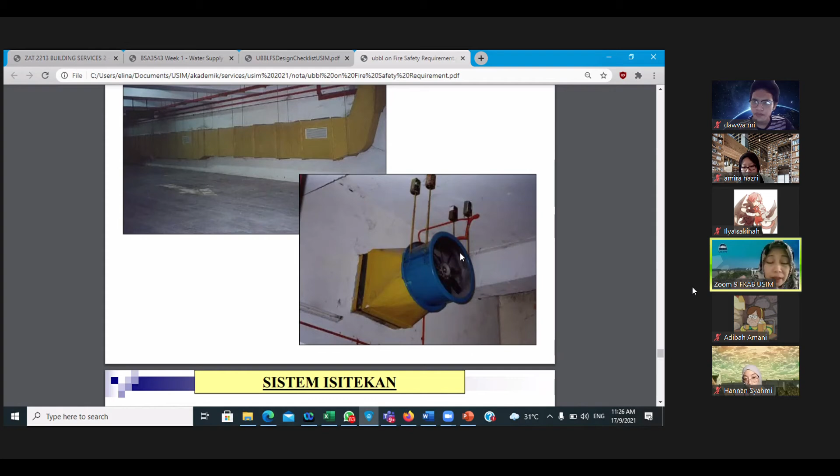Okay, we are almost at the end. This is the control system that you need to design for. Normally at the ground floor area, beside the lobby area, they must have a control room. So those officers will control the electrical appliances here, the computing system. They must have a plan for how this can generate function to all stories of the building - that's in the control room.

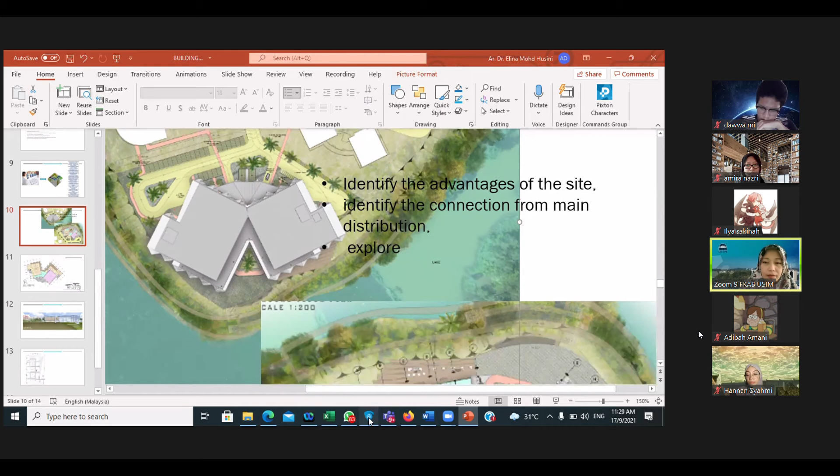Okay, for the others, what I can tell you is these are the criteria in your building bylaw - your level only schedule 5, 7 and 10. For staircase design, please refer to sections 195, 197, 198 because there are rules for dimensions. You must know this, it's compulsory for you to know - you can't play around anymore.

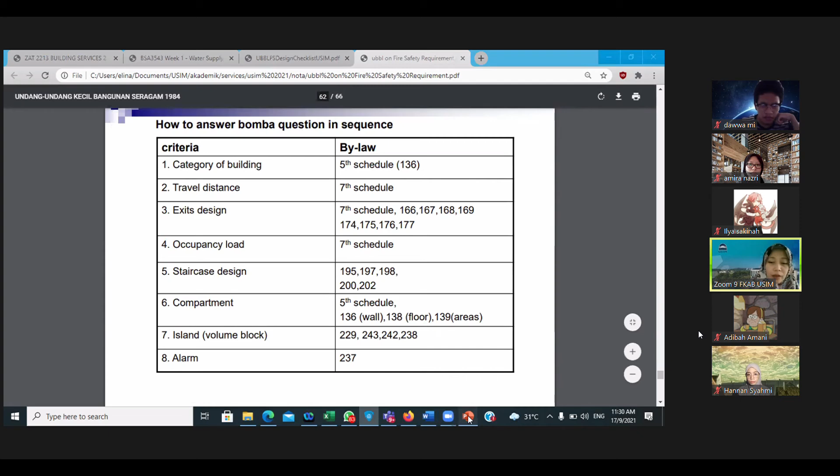Exit design means where you want to allocate your exit door - how is the circulation? Look at this area. I'm not saying this is the best design, but you must have a clear circulation corridor for people to understand clearly where to enter and exit the building. So you may judge buildings you visit in future - whether it's a good building to be followed as an example, or a bad building. It's bad when you come into the middle and cannot escape, you don't know the direction to escape.

After MCO, InsyaAllah we can have a visit to the buildings. I wish to bring you all to the site construction area so we can go and see it directly.

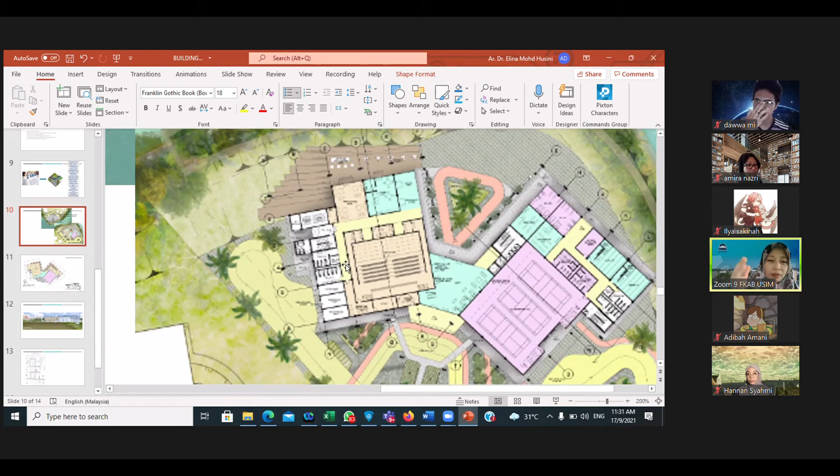For theory here, we just need to understand the vocabulary, the terms, and the images, how it looks like. If not, when I simply send Hiba to site, she cannot understand because she cannot imagine it.

So previously I said the height of the building is a matter for us as a designer to decide which system can be used in the building. Since your building is only 2-story, it's okay.

But this is for your knowledge going forward. Your knowledge cannot stop this semester. You have to bring this up to 3rd year, because when you are designing an 8-story building, the studio master will ask who taught you services too. If you say Madam Elina did not teach me, watch out, I will catch you. Because 3rd year is 8-story, higher and more complex.

I think that's all for now. Today we just get familiarized with this thing, so we have to know the fundamentals - where to use, what to use, and why.

Okay, coming back to my slide here, let's get familiarized with this.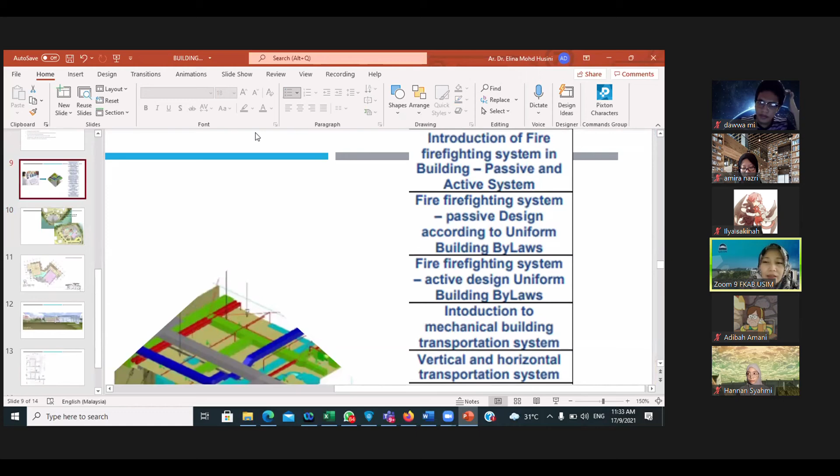Can you read this? This is only the first category, the first section of the introduction to the firefighting system, and building passive and active systems.

So we will do some calculation for next week. If you already have your site area, please bring it so we can do the calculation together.

Easier right? Easier to get into your head. So this knowledge can be adapted to your design studio. We want to facilitate everybody to make the design faster and make your design reliable.

Alright, only that for today. So, any other questions? Is there any question?

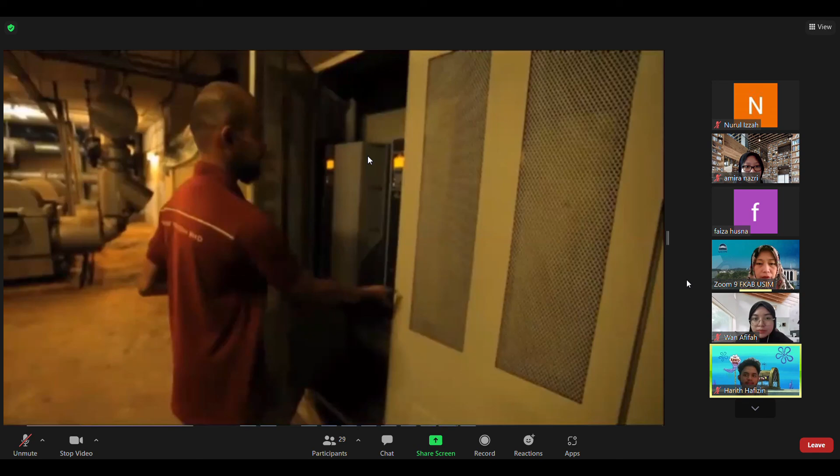Only 7 minutes. Can you see this? Can you? Can you see? Am I sharing? Yes, yes. Okay, so this is normally found inside our building.

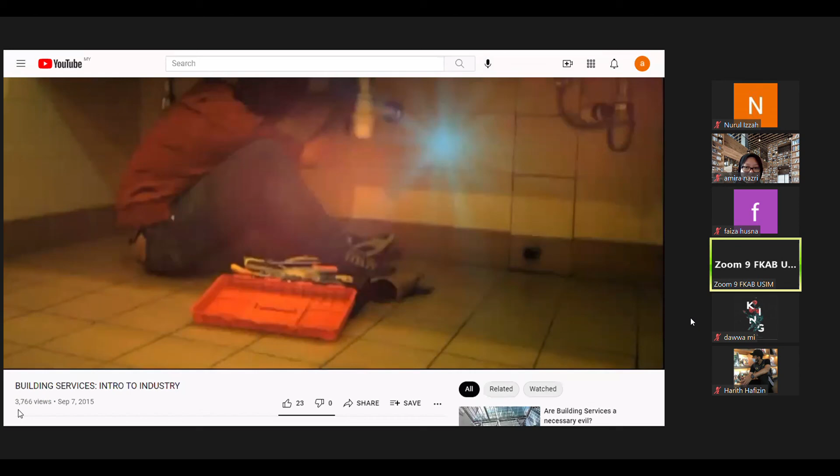Building services engineering also faces the challenge of ensuring our buildings are energy efficient to reduce our overuse of energy sources, and by doing so, helping our society reduce the depletion of our natural resources and minimize environmental pollution.

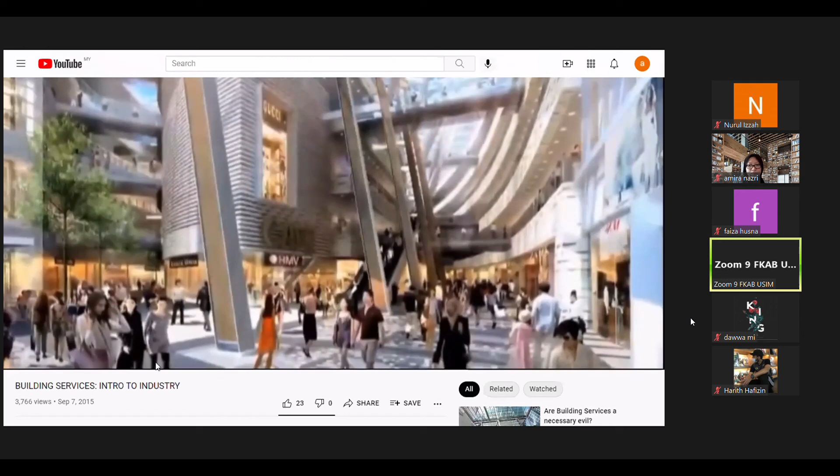Imagine yourself in the most fabulous building in the world. Now take away the lighting, heating and ventilation, the lifts and escalators, acoustics, plumbing, power supply and energy management systems, the security and safety systems, and you are left with a cold, dark, uninhabitable shell. Building services engineering is what makes a building come to life.